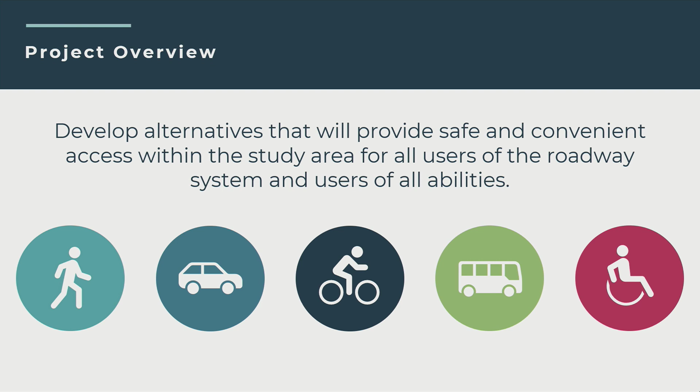So a little project overview. The idea of this project is to develop alternatives that will provide safe and convenient access within the study area for all users of the roadway system and all users of all abilities.

There's three main project goals in all of the projects we work on at the Commission. Number one being to improve safety. Number two is to reduce congestion. And number three is accommodating all roadway users. That includes not just motorists, but those walking, those biking, those in wheelchairs, those hard of hearing, and however you want to look at it. Anyone using the roadway network is who we're trying to accommodate here.

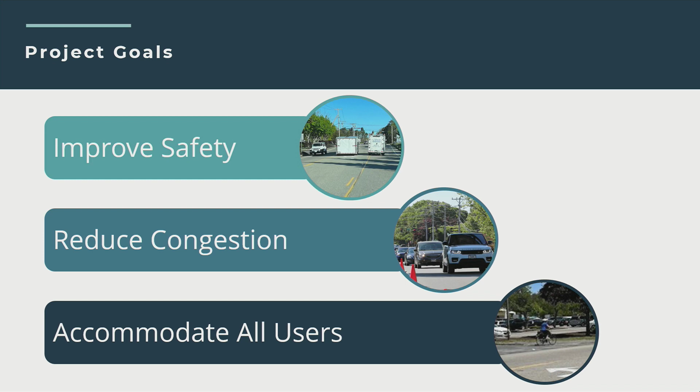Our study area is the Station Ave corridor study. This extends for a large portion of Station Ave from the Route 6 interchanges to the White's Path Workshop Road intersection, sort of through that business corridor to the Old Townhouse Road intersection, down through the neighborhood area to the schools, including the Long Pond Drive and Regional Ave intersections, and then to the Wood Road intersection.

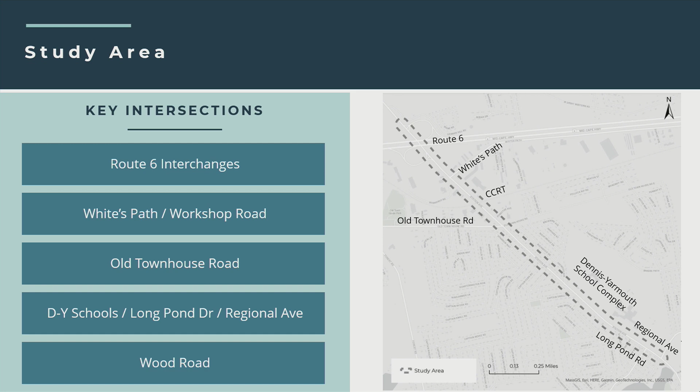Now we'll get into the January meeting back in this year, 2023. We had a meeting in this room to go over this project. We had 27 virtual attendees, 25 in-person attendees, and we got a lot of public feedback.

We did a project overview, and we looked at existing conditions. I walked through the crash history on the corridor, the speed limits on the corridor, existing land uses, and we did a photo inventory. I took a lot of photos from site visits, and we walked through that together.

I wanted to make sure that what I was seeing on this corridor is what folks that use this corridor every day are seeing. We received 60 public comments during the meeting, and then we received another 17 in the month after via email, and all of those comments are actually posted on the project website as well, so you can see what folks were chiming in on, and we took all of these into consideration as we started doing our concept development.

I mentioned a second ago, too, I wanted to say this at the beginning: I use Station Ave every day. I live in Yarmouthport. I access all the businesses. I shop at that Stop and Shop. I get pizza from Sweet Tomatoes far too often. So I use this roadway. I see a lot of the issues, and I want to make sure that what I'm seeing is what you're also seeing, so that way we can improve all of those goals that I mentioned earlier.

So going back to that first public meeting, like I said, we received tons of comments. I'm going to start with the ramp area. I broke it down into sections here so we can summarize what we heard.

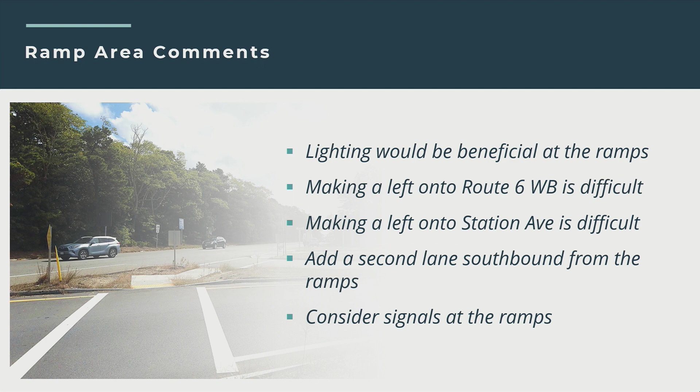Making a left onto Station Ave is difficult. I think you could probably say that for the bulk of the corridor, not just this ramp area. Add a second lane southbound from the ramps heading towards the White's Path intersection, and consider signals at the ramps. These are just some of the comments I tried to summarize. Some of these we heard more than once. Lots of good details here that gave us a chance to look at.

Then we moved to the business area. We received lots of comments in this area as well. We heard things like extending Station Ave, the northbound right turn lane at the White's Path intersection, making that right turn lane longer. We heard extending the Station Ave southbound right turn lane at Old Townhouse Road, in front of the Sunoco station, extending that right turn lane.

We heard that there needs to be more education on how to use the two-way left turn lane. We talked a lot about how folks are using that as a travel lane at times, and they're not always using it correctly. Improving connections to the Cape Cod Rail Trail.

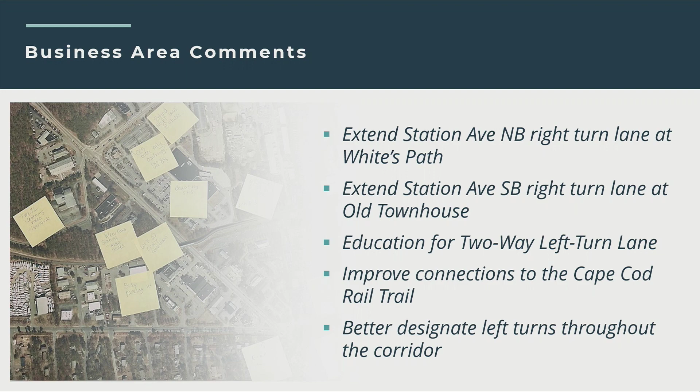It's a very awesome feature to have along the Station Ave corridor, having access to the rail trail. So how can we improve those connections? And better designating left turns throughout the corridor. I mentioned the left turn to the ramp area, but trying to understand where to turn left, who's turning left, and when.

School area comments, heading down towards the DY high school, middle school section of the corridor. We heard that sidewalks are needed on both sides of the road. We had a comment that we need to improve the crossing at St. Pius Church. We need to improve the drop-off pickup traffic flow at Dennis Yarmouth High School.

We heard that we need to encourage or incentivize students taking the bus to get fewer vehicles out of the drop-off pickup cycle. Better access management, maybe reducing curb cuts, fewer access points, more uniformity throughout the corridor.

And then rectangular rapid flashing beacons at all crossings. Those are the little flashing warning lights at a crosswalk that indicate to vehicles that somebody is trying to cross. We heard a comment that those should be at all crossings, particularly in the school area.

We heard a lot of other comments that weren't focused just on those areas. Wood Road, we got a lot of comments, and I'll summarize it as safety improvements. There were a lot of different ideas, from brush trimming to making it a signal to making it an all-way stop. We looked at a lot of different options there as well, but I summarized that as safety improvements.

We heard that the town should consider doing a Safe Routes to School partnership with the schools. Debris clearing, litter and sand along the sidewalks. There's been some runoff with sand at the sidewalks up near the ramps. I think generally people are seeing a lot of litter and debris on the side of their roads too, so that was mentioned as well.

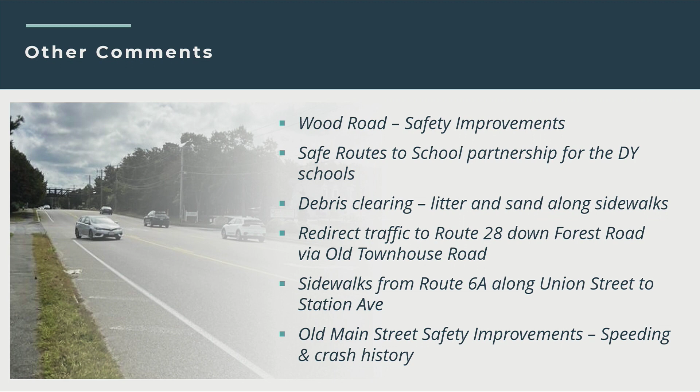And then also outside of this project, but we did hear some comments at this meeting, or our previous meeting, that Old Main Street in Yarmouth needs some safety improvements. There's known speeding and crash history there. So I like to document everything, whether it's part of this project or not. Maybe it's something we can revisit down the road.

Some of those crashes are on the actual highway. We did break that out into a more detailed look. White's Path at Workshop Road had 19 crashes over 3 years, making it the 47th highest crashed intersection in our region. When something sticks out in our top 50, that really strikes a chord, and we want to get involved to see what we can do to improve that.

Old Townhouse had 14 crashes during that period. Long Pond, Regional Ave, that area had 16 crashes during that time, a lot of them rear ends, which kind of makes sense with the congestion of the school area there. Wood Road had 15 crashes just at that intersection alone over 3 years, averaging about 5 a year, which is far too high if you ask me.

The 3 years we analyzed for crashes fortunately had no fatalities, but there was one along Station Ave in 2014, just north of Old Townhouse Road. I like to mention that so we're aware that just because it hasn't happened in the window we're looking at, it has happened and it could happen again. That's why we're trying to get ahead of this by making these improvements.

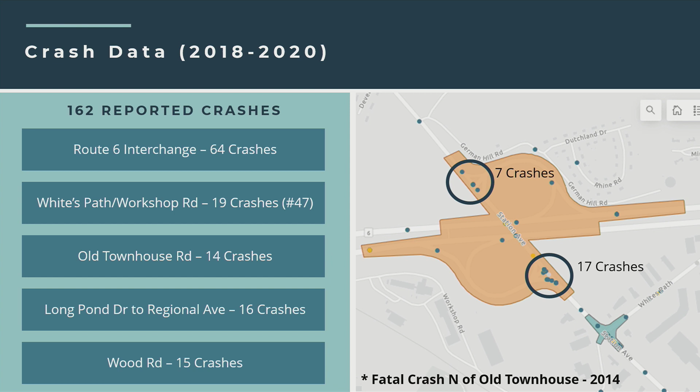I broke out the crashes a little bit more. The northern ramp, the Route 6 westbound ramp, had 7 crashes over this 3-year period. The southern ramp, Route 6 eastbound, had 17 crashes over that period, which would be very close to the 19 crashes White's Path Workshop Road has to crack our top 50. So it's right there.

Some key crash notes: 35 of the crashes resulted in an injury. 70% of crashes were rear end or angle collisions, which tells me congestion and left turning vehicles are really causing some of the issues we're seeing. 81% of crashes occurred during daylight, which again makes me think of congestion and just how busy the roadway is.

There were 4 non-motorist crashes north of Old Townhouse Road during this 3-year period - that's a bike or pedestrian being hit by a vehicle. There were also 2 non-motorist crashes at the Long Pond Drive intersection down by the school during this 3-year window.

Crashes always stick out to us. There's safety challenges obviously, and so we had this public meeting, we met with the town, we reviewed all the comments, and we started thinking about what the next steps would be.

There's a process called a road safety audit that MassDOT spearheads, and we work with them to conduct these audits. We do a couple a year throughout our region, always trying to find high crash locations to do these at. This year we prioritized a road safety audit at the White's Path Road intersection on Station Ave.

A road safety audit is a formal safety review of an existing or planned road or intersection. During the audit, an independent multidisciplinary team identifies potential safety issues and opportunities for safety improvements.

I guarantee you that. So at the same intersection, the westbound ramp, here I show the roundabout concept. And as I just said, if we're looking at a signal, we have to look at a roundabout as well. That's kind of a requirement we have with the state. So we look at a traffic signal, we look at a roundabout.

I can hold on here. I know everyone has it in their packet too, and we also have bigger copies up at the table so we can come around and walk towards the end here.

Cost-benefit analysis: it improves safety even a little bit more than a traffic signal does. It reduces congestion about the same as a traffic signal, and it improves bike and pedestrian accommodations about as well as the traffic signal. However, it does impact property a bit more than the traffic signal. It's a little bit wider, a little bit bigger. There would be more takings involved to build this out.

But both of these concepts work. So one measure we look at is level of service. These intersections, both the signal and the roundabout, improve the intersection through safety, congestion, and the bicycle and pedestrian accommodations. Both have a little bit of takings, property impacts there. So that's the cost benefit, which one would you prefer, based on this information.

So we go to the southern ramp. This is the Route 6 eastbound off ramp, and I'm going to offer you the exact same two concepts here, a traffic signal and a roundabout. Same thing, a sidewalk proposed on the western side of the road, a shared use path for bikes on an off-road facility on the eastern side of the road, and then the signal here to stop traffic. The difference on this one is that right turn lane actually has a stop light.

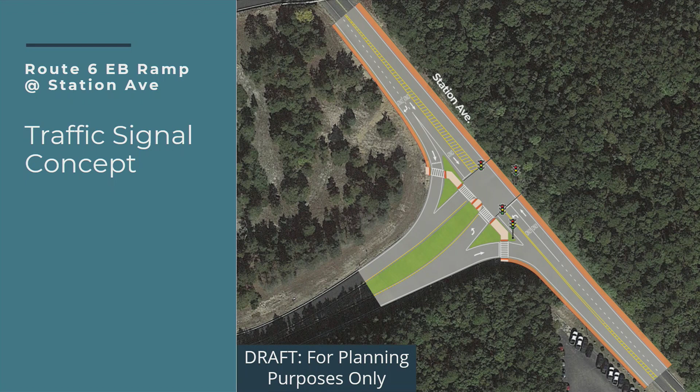So it would stop the right turning vehicles, so the yield would be gone in this concept. But they would get that red time from this approach, and then they would be able to travel onto Station Ave unimpeded. This works kind of well. There's that left turn lane and a through lane. There's a lot of pavement there already. It almost functions like this today with that wide shoulder that people use as a through lane now. This improves safety because now it's an actual lane. You don't have to guess if the vehicle in front of you is going straight or turning left, because not everybody uses their blinker.

Benefits: it improves safety, congestion, and bike and pedestrian accommodations quite well. Again, there are some minor property impacts because we'd have to make this intersection a little bit wider to fit all of the accommodations we're trying to fit here.

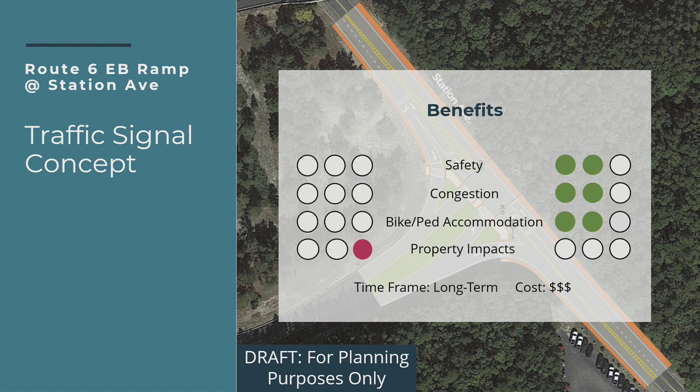We go to the roundabout concept. This one has that same build. It has a through lane, basically, that you would travel on the outside of the roundabout here, and it has that left turning lane to separate the lefts from the rights. This helps improve the traffic flow. We look at a lot of different styles of these, if it's just a single lane or a multi-lane all the way around. This, we're doing the one through lane with a left turn lane.

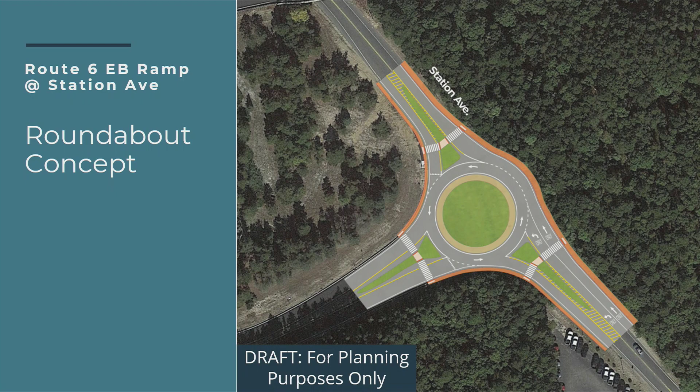Again, bike and pedestrian infrastructure on the outskirts of the roundabout here to get people off the road. Again, it improves safety slightly more than the traffic signal. Roundabouts really do slow vehicles down. It improves congestion and bike and ped accommodations, but it impacts the property surrounding it a little bit more than the traffic signal does due to the size.

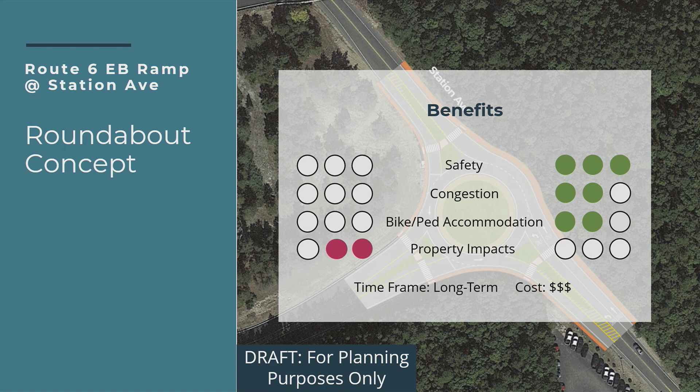Moving further south, we hit the White's Path road intersection. This slide shows all the recommendations from that road safety audit I mentioned earlier, done with DOT and the town of Yarmouth. These are some of the direct recommendations from that report: extending the right turn storage lane on White's Path and left turn lane on Station Ave southbound, giving those vehicles a longer area to queue.

Constructing larger pedestrian islands to improve visibility. We heard that they are really difficult to see and vehicles are running over them more frequently than we're even aware of, because if no one's there and no one gets hit, it doesn't get reported, they just drive off and it doesn't get registered as a crash.

Upgrading traffic signal equipment and improving lighting. Again, lighting has been a common theme on this corridor, so improving the lighting there and updating the traffic signal equipment. It's fair to say, if we do anything at the ramps, we have to do something at White's Path. If you just build a signal or a roundabout at those ramps, leaving White's Path as it is, these aren't going to work as well as we would like. So there will need to be something done at White's Path to create uniformity in this area.

Signage upgrades at and approaching the intersection, to let people know where they are and where they're heading. Installing a flashing yellow left turn arrow, I have a graphic on that in a bit. Limit access to right in, right out at the northern Mobil driveway. Mobil has 2 driveways right now, fronting Station Ave as well as back access to Workshop Road. Reducing that northern driveway, the one that's almost in the signal, to right in, right out could go a long way in reducing some of the crashes or close calls we're seeing at this location.

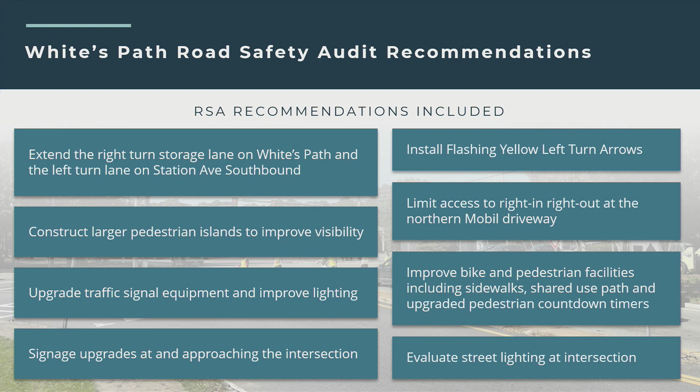Improving bike and pedestrian facilities, including sidewalks, shared use path, and upgraded pedestrian countdown timers, and evaluating street lighting at the intersection. So here is White's Path as it currently sits today.

Here is a reconstruction concept that improves the intersection, much like the other concepts I showed earlier. Some of the key differences between what it looks like today and what I'm showing here is we're removing those channelized right turn lanes that create this fast-flowing yield control through crosswalks that aren't signal controlled.

We're also proposing that right turn lane becomes a through-right lane, so vehicles can store to go through in both these right lanes. This would reduce the number of vehicles queued up past Stop and Shop, under the Cape Cod Rail Trail Bridge, and back towards Dunkin' Donuts. It gives that space, and with signal timing you'll be able to move through this intersection well.

If you are the right-turning vehicle, you have to queue pretty far down by Stop and Shop today if there's a long queue. You'll be able to get in this lane as well, and your time to go really isn't reduced at all.

Other than reducing the channelized lanes, the benefit is that the crosswalks currently there do not have any sort of control. When you push the push button, you're actually pushing it from the island, and you can't push anything from over here, so you're walking around a blind curve. Vehicles really can't see if somebody's coming around there.

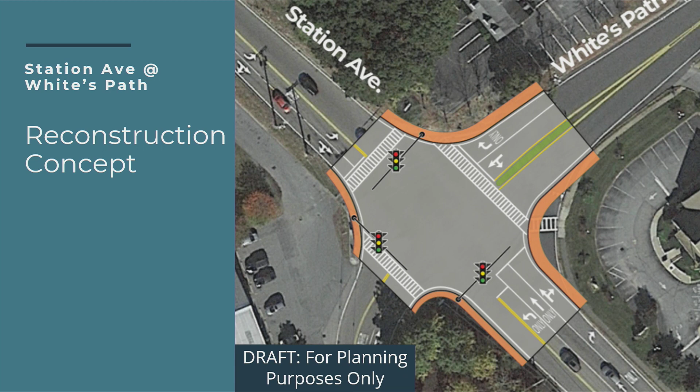So I'll go to the cost benefit of this. It improves safety, congestion, and bike and pedestrian accommodations a bit. You won't see it get that second level that the total new construction sees, because there are some amenities out there today, but this would improve safety and congestion a bit based on a lot of the modeling we've done. There would be some property impacts as we try to build out that shared use path along the edges, and the sidewalk on the eastern and western side of the road as well.

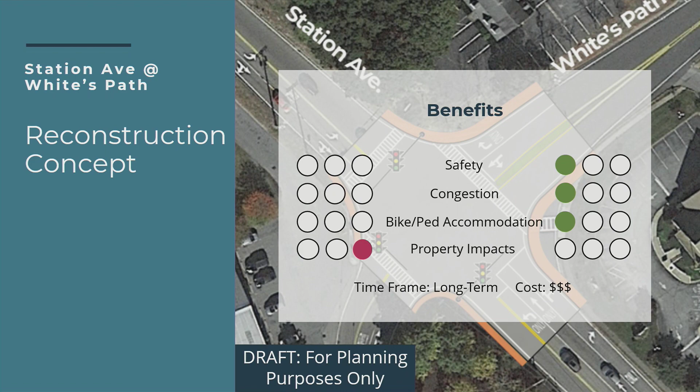All right, so the next intersection here is Old Townhouse Road. I'm showing you the current layout. Before I get to the concept, a lot of the recommendations here are the same you'd see in a standard roadway safety audit, like we're recommending at White's Path. So, a flashing yellow arrow - I've got a graphic here explaining what that is - and reviewing the pedestrian infrastructure and countdown timers.

Reviewing or improving the signal timing. Retroreflective backplates to make the signal equipment stand out more, especially during tougher times of day to see. Signage directing to Route 28 via Old Townhouse Road, and crossing upgrades to shorten the distances of these crossings.

We'd be looking to remove, if we could, this right turn channelized lane. People are trying to cross here on a blind curve, so if we could bring that up to the intersection - there'd need to be some work done on this island to make it not so tight of a turn - that would improve the pedestrian accommodations here greatly.

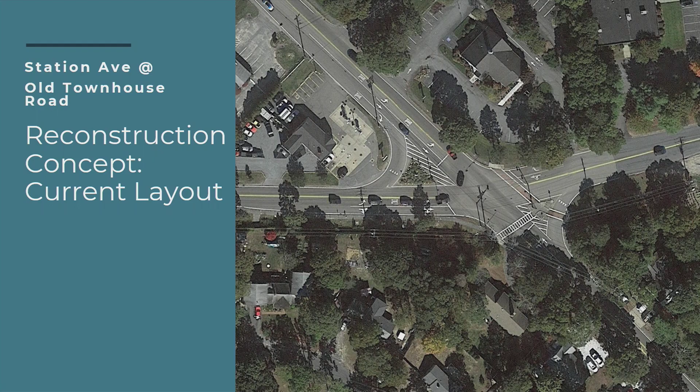Overall, from our analysis, the Old Townhouse Road intersection actually functions quite well, and the crashes here really aren't that bad - though I don't want any crashes, I'll put that on the record. However, most of them were rear-end collisions, minor ones. This intersection functions pretty well compared to the other intersections in this corridor.

But when we are looking at alternatives, we do have to look at the roundabout as well. So this is a very conceptual look at what a roundabout would look like if it was just placed at this intersection. And here are the cost benefits.

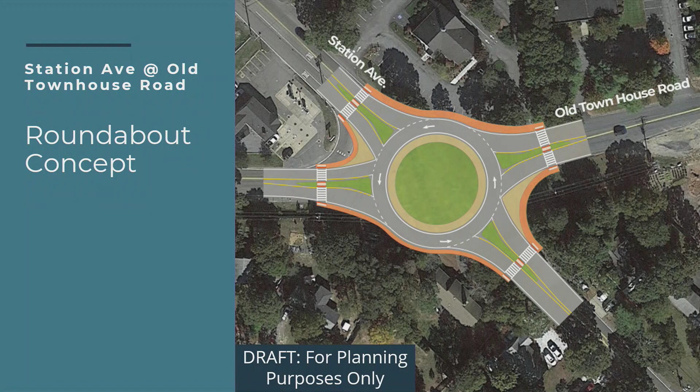It improves safety and congestion, but not as much as the other roundabouts do, because those other intersections are a lot worse currently than this one is right now. It improves the bike and ped accommodations, but property impacts are getting all three - I guess traffic lights is kind of how I look at these. It's doing a lot of encroaching on the land around the intersection. And I'm here to say that I would not be recommending this treatment at this intersection.

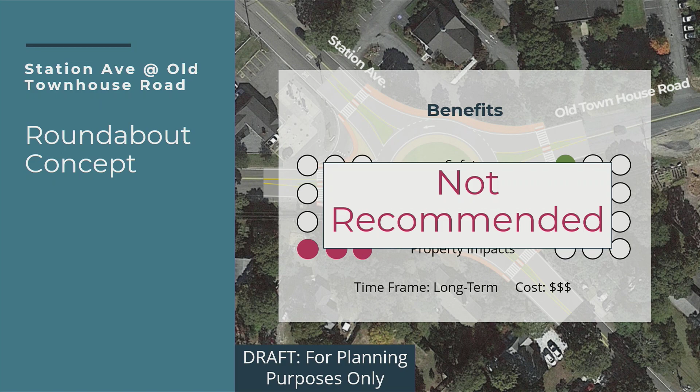But I wanted to explain that this is something we look at when we're looking at all these intersections. We don't think the cost benefit at this intersection is worth the time and funding to do this. I don't think this needs to be done here. I think a lot of these smaller, cheaper improvements could go a long way in improving this intersection as well.

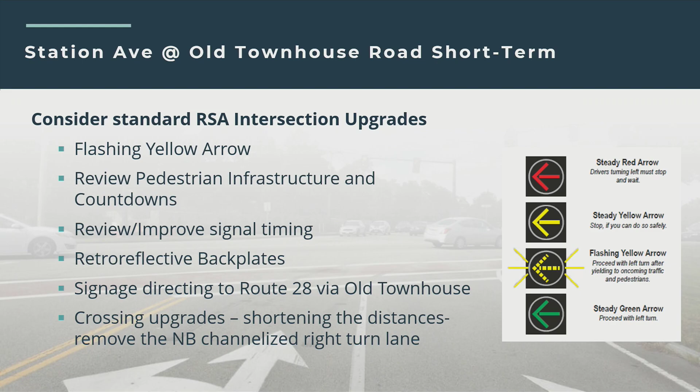Okay, now the fun part: roundabout versus rotary. I have to talk about this for a minute since I am proposing a couple of roundabouts along this area. A lot of people get roundabouts and rotaries confused. A rotary is what you see on the left here - that's the Mashpee Rotary over by Mashpee Commons. That has a 300-foot diameter.

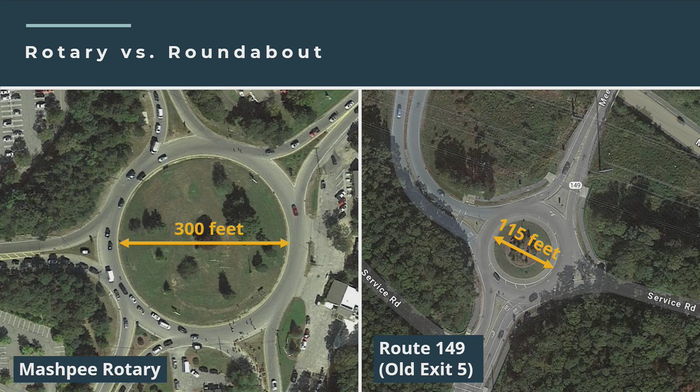The roundabout on the right is at Route 149, Old Exit 5, which has a 115-foot diameter. The difference besides size of a roundabout and a rotary is the deflection, the way you enter the circle. On a rotary, it's more of a merge, like a highway merge - it encourages high speeds and lots of vehicles. The roundabout brings you really tight into it and then kind of turns you in, so you have to go slower to enter. Collisions at roundabouts are a lot less severe and less likely than at rotaries. I just want to make sure we're not getting those confused.

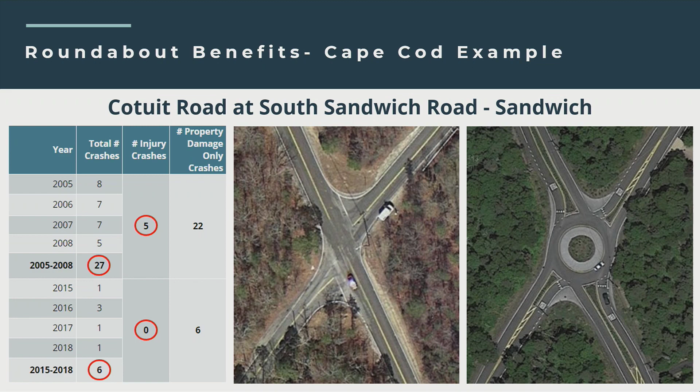So there really is a benefit to improving safety with a roundabout if designed and built correctly, which we will make sure happens if that's the way we move here. I just wanted to offer a location where not so many folks were sold, and it actually worked out really well - a really good example of a well-constructed roundabout that improves safety. So that's my tangent, I won't go back to that unless you'd like to talk more.

I'll move to the last intersection area of the corridor here, which is Station Ave at Wood Road. We heard in the public meeting that there needed to be safety improvements, including looking at a stoplight signal.

It did not meet a signal warrant when we did a 12-hour count. Myself and Evan, who's here with us tonight, spent several hours out at this intersection counting and observing the traffic, and it did not meet, based on standards, the number of vehicles to put in an all-way traffic light. However, it might potentially meet an all-way stop.

The reason it might meet that is based on the crash history. If there are 5 crashes per year over a 3-year period, which this exactly meets—I think it was 15 over the 3 years, which is 5 a year—and then future growth patterns. As volumes increase everywhere, we think an all-way stop could very well be feasible here.

While not ready to recommend that yet, that's a conversation we want to keep having with the town—is that something the town would like to look at? We will go back out and do more traffic counts, probably towards the end of the school year before school gets out, and then maybe even again in the summer during that peak season, to support whether or not we should look at an all-way stop at this intersection.

Other recommendations for this intersection include installing a crosswalk across Wood Road connecting the existing sidewalks. Right now there's a sidewalk along Station Ave, but there's actually no crosswalk at the intersection. That could go a long way in improving the visibility of the intersection, letting vehicles approaching know that there could be people walking or biking.

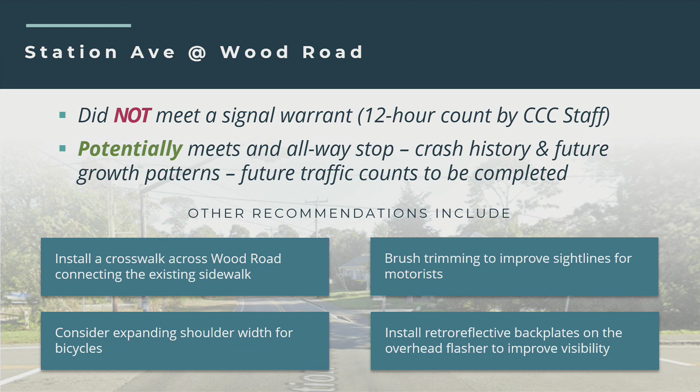So then we have several corridor-wide concepts that we're also recommending. One of them, shown in this graphic here, would be utility pole and/or tree relocation or removal on the northwest corner of the CVS driveway.

If anybody ever tried to take a left out of here, it's very challenging—not just because of the utility pole and the trees, but those certainly don't help. By the time you can actually see what's around them, you're in the lane. I took this photo Monday, and several cars couldn't get out for 10 plus minutes. The queue here was back 5 or 6 cars just trying to get out of the driveway. I really think the sight distance causes that issue, because it makes people hesitant to want to go—when they feel like they can, they're not quite sure.

Another thing was, what do we do with the two-way left turn lane? There were a lot of ideas kicked around. We're recommending at this point to consider repurposing it into designated left turn pockets. This would be leaving it as it is, but with paint identifying where vehicles can pull into the left turn lane to queue to then turn left into the business driveway they're looking to access. We're hoping this can discourage vehicles from using it as a travel lane.

You see far too often a vehicle flying past the left turn arrows because they just want to jump to the top of the queue at the White's Path intersection, so we're trying to discourage that through some cheaper methods. We looked at the feasibility of installing a median along Station Avenue. While it has benefits with reducing the number of angle collisions and crashes...

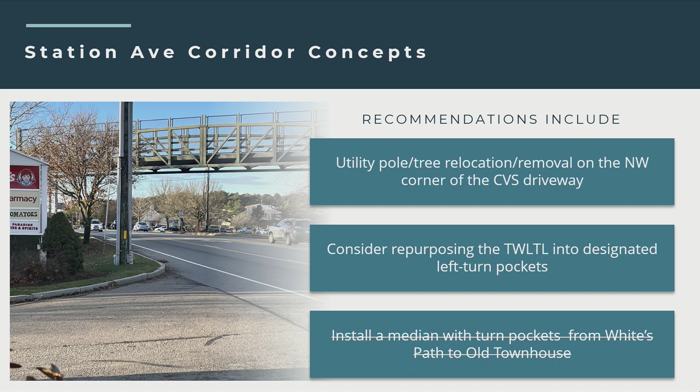But I want to hear from you at some point, whether that's a good idea, whether we should revisit it again, or just thank you for looking, whatever it might be.

Some other concepts along the corridor include improving lighting. We've talked about that three or four times now. Under the Route 6 underpass there's no lighting, though there are facilities and technically a sidewalk under there. We walked it, and with all the concepts we're bringing forward like a shared use path or improved sidewalk, having lighting under there would make it visible so people can see vehicles and pedestrians walking. At the ramp intersections themselves, there's no lighting currently, so something simple like that could go a long way in improving safety.

And then the White's Path intersection—those were areas that really stuck out. There's a conversation to be had about lighting as you get further down towards the schools, those neighborhood areas. So I want to hear feedback on that as well—is that something we missed, or are there other locations that need improved lighting?

Then access management—considering reducing left turns out of driveways and encouraging interconnections between businesses. Maybe there's a chance where some driveways we can say right turn only or no left turns. With that two-way left turn lane as we redesignate it, you create areas where vehicles are supposed to turn left, maybe not every driveway, but that's where the interconnections come in.

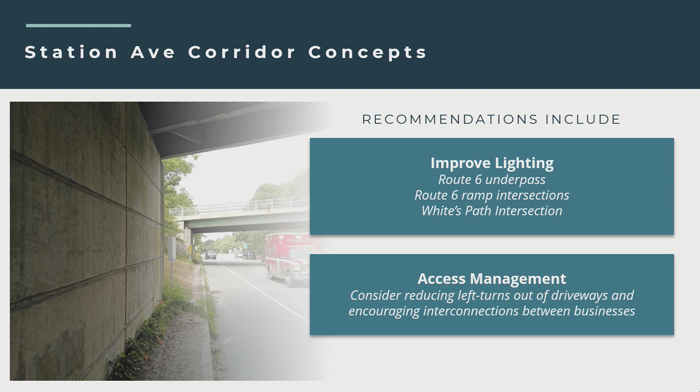This area actually has some really good interconnections already. An interconnection would be, think about the CVS, Wendy's, Sweet Tomatoes, and Advance Auto driveway—you can pull in there and access all these businesses from one access point. So making sure any new businesses try to connect to existing driveways, and maybe reducing the number of driveways along Station Avenue, and certainly not encouraging any more going forward.

So then we have some school area concepts as well. Consider allowing only right turns out of the school during peak drop-off and pickup times. Improving bike and pedestrian infrastructure to encourage alternative modes of travel. Encouraging DY schools to partner with MassDOT's Safe Routes to School program, which can help them do walk audits and seek funding for projects to and from the school.

Consider a paved pull-off along the school property to get school-bound vehicles out of the travel lane. Installing a rectangular rapid flashing beacon at the crosswalk in front of DY, as well as St. Pius Church. Any crossing in this area where the schools are should have some sort of warning treatment. The new signal there has a push button down by the new middle school, so improving the crossing accommodations in this area would go a long way.

And then extending the existing shared use path. Right now there's a new shared use path in front of one of the schools down there, but extending that to the intersection of Regional Ave and Haywood Ave would cover the entire school area, providing uniformity so there's no need to cross from the bike path over to the sidewalk on the other side of the roadway—just having that continuity through the school area.

Potential multimodal accommodations and recommendations, corridor wide: a shared use path on the east side of Station Ave from the ramps to Old Townhouse Road, which I've talked about throughout all the concepts here, a sidewalk on the west side of Station Ave from the ramps to Old Townhouse, and the shared use path in front of the school property again.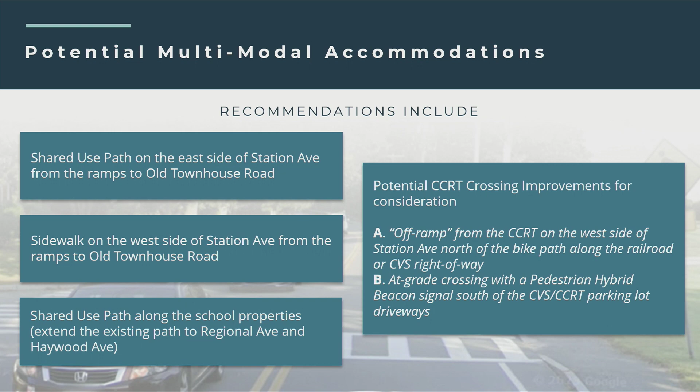The other concept is an at-grade crossing with a pedestrian hybrid beacon signal south of the CVS and Cape Cod Rail Trail parking lot driveways. I'll show you that as well.

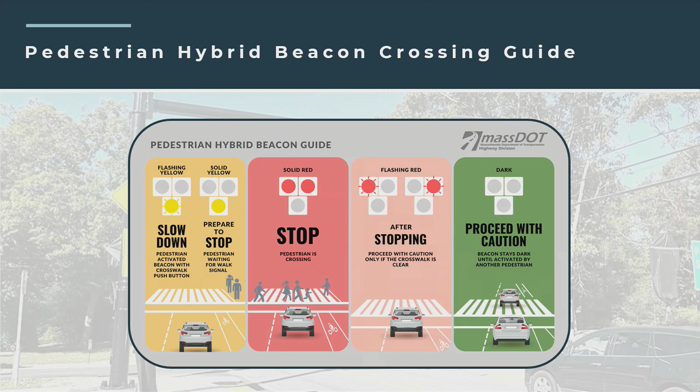So if you were looking to access CVS or the businesses here and you were on the rail trail, you would come down through the sidewalks and paths, push the button, and cross.

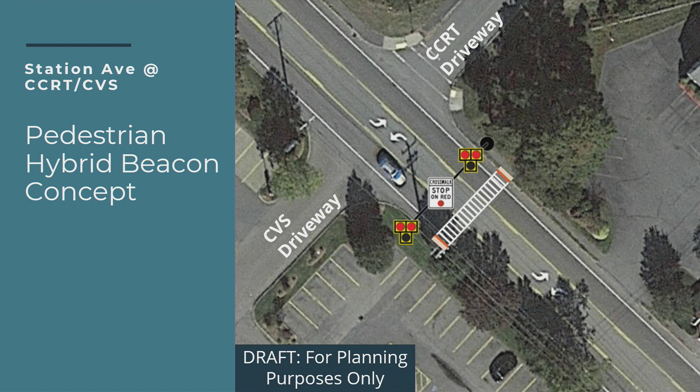What's important with getting a crossing treatment on Station Ave is that Barnstable is going to be joining the Cape Cod Rail Trail network within the next two years. So Station Ave is no longer going to be the end of the Cape Cod Rail Trail, it's going to be a destination along it. You'll have people coming from Hyannis and Barnstable trying to get all the way out to the Outer Cape, and there could be a need to get off here and grab a beverage at CVS, or Advil if you don't bike much, whatever you need. So knowing the rail trail is expanding and this is a key portion of the facility, we want to make sure folks can get around safely when they're getting off the path.

Showing the benefits: it improves safety greatly and doesn't really do much to congestion, since it only stops traffic when somebody's trying to cross, so it would only stop periodically. It improves bike and pedestrian accommodations quite greatly, property impacts would be very minor, not even worth noting, and it's the first alternative with one money sign for cost. So this is a smaller thing that could be done.

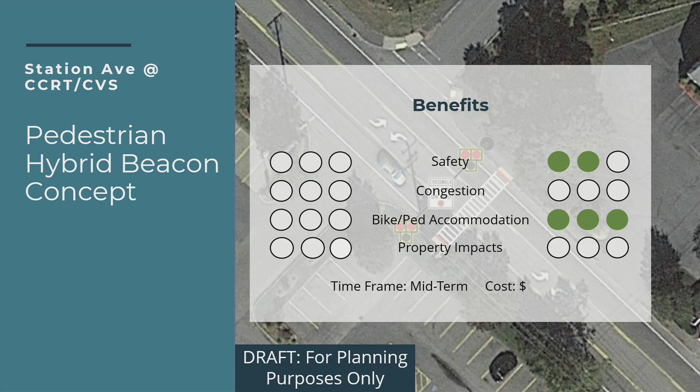Okay, those are all the concepts I have to share. That was a lot, but now the next steps.

We want to review and summarize any input from public comments, anything folks would like to share tonight or over the next month. We'll have a public comment period open until January 13th to keep collecting information and ideas, meeting with the town, DOT, the chamber, and the businesses to get their thoughts. We'll do concept refinement based on what we hear, and if you tell us no on something with good reasons, we'll reconsider to make sure we get the right alternative for this area. We'll coordinate with the town and DOT, especially at the ramps since DOT owns that infrastructure, and we'd be looking to have a draft and final report later this winter or earlier this spring.